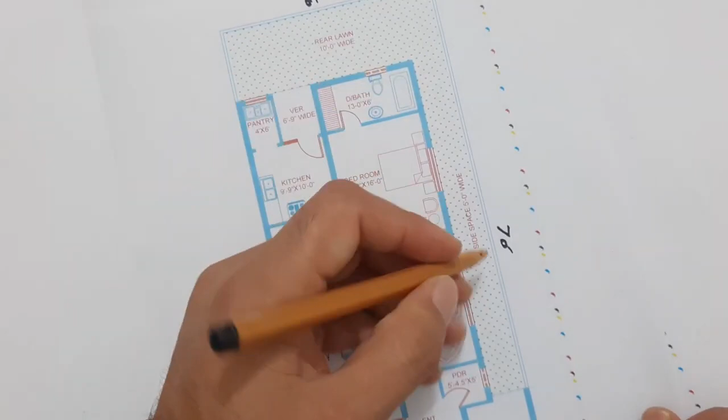Size is 30 by 70 feet. The side open space is 5 feet. The back is 10 feet.

Here we have just one bedroom on the ground floor. On the first floor we have two other bedrooms. As you can see, this is the main gate, which width is 13 feet.

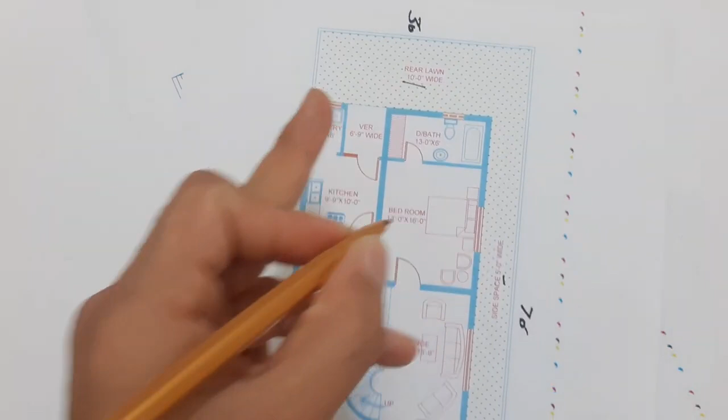This is the driveway. Front lawn is 10 feet. Back side is also 10 feet. This is the car porch. Size of this car porch is 8 feet by 8 feet 7.5 inch.

This is the main entry. So when you enter by this main entry, which size is 7 by 7 feet, this is the powder room. This is its ventilation. The first one you can see, this is a drawing room.

And here you can see the corner window for this drawing room. Size of this drawing room is 12 feet by 17 feet 6 inch.

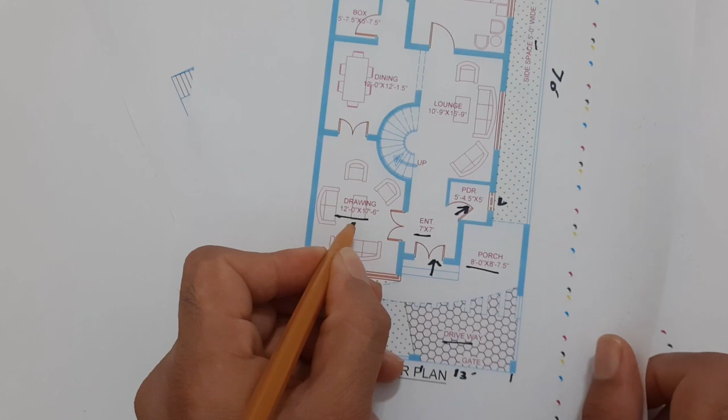Next you can see this is the first floor. This is the staircase for the first floor. Half circular stairs, you can see.

With this drawing room you can see this is the access to this dining. The size of this dining is 12 feet by 12 feet 1.5 inch.

You can see the access to this dining from this TV lounge. Size of this TV lounge is 10 feet 9 inch by 15 feet 9 inch. This is the window to this open passage.

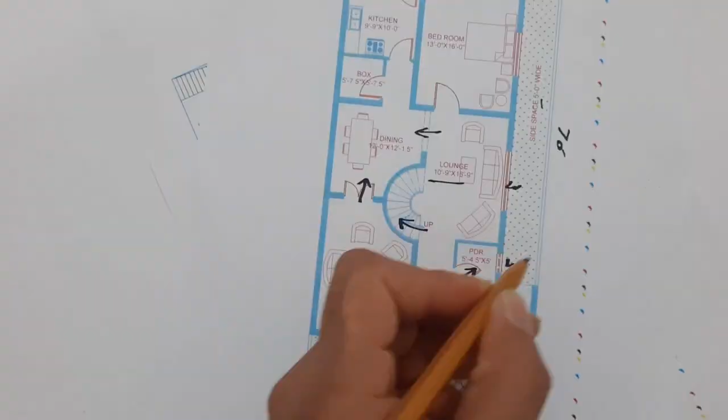Now guys, you can see this is the first bedroom. Size of this bedroom is 13 feet by 16 feet. This is the window to this open passage, which is 5 feet.

Next, with this dining, guys, you can see this is the passage, about 3.5 feet. And this is the box. Box means this is a kind of store, which is 5 feet 7.5 inch by 5 feet 7.5 inch.

And directly you can access the kitchen. Size of this kitchen is 9 feet 9 inch by 10 feet. You can see the veranda.

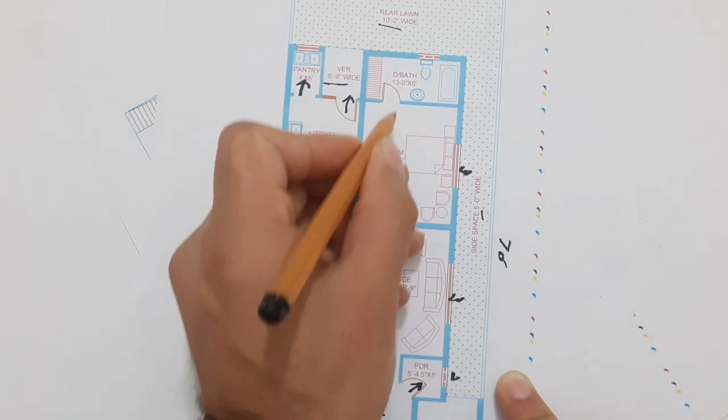Size is 6 feet 9 inch width. This is the pantry, 4 by 6 feet. In this bedroom you can see this is the dress room and also bath, 13 feet by 6 feet.

This is the wardrobe. This is the ventilation. Okay, everything is perfect. Now guys, we have also here the first floor.

So here we have circular stairs for the first floor. Access also at the back side lawn, you can use it. Guys, this is its ground floor.

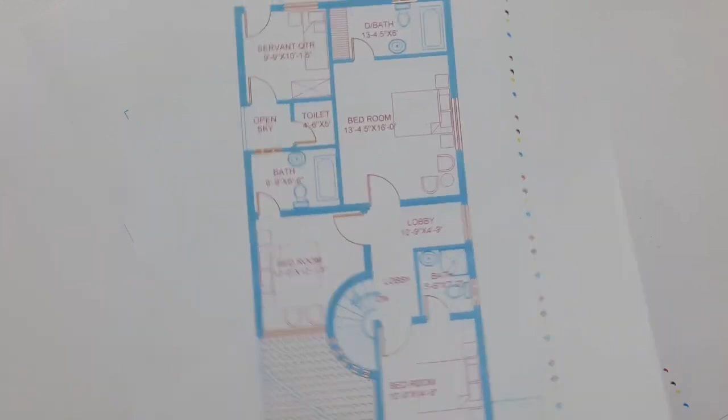This is its first floor plan. We have the first bedroom. So this is down for the first floor staircase.

So here when you go up on this stair, this is the first floor. This is the first bedroom. Size is 10 feet 9 inch by 14 feet 6 inch.

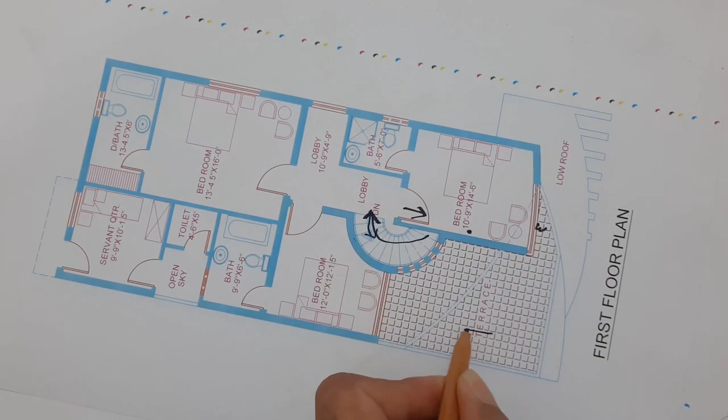This is the window. This is the low roof and this is the terrace. And here you can see the small windows.

You can see clearly for this stairs. And this is the window for this bedroom, the second bedroom. Size is 12 feet by 12 feet 1.5 inch.

Next you can see this is the lobby, which width is 5 feet. Sorry, this is 6 feet.

With this bedroom you can see this is a bath. Size of this bath is 5 feet 6 inch by 7 feet. This is the small window.

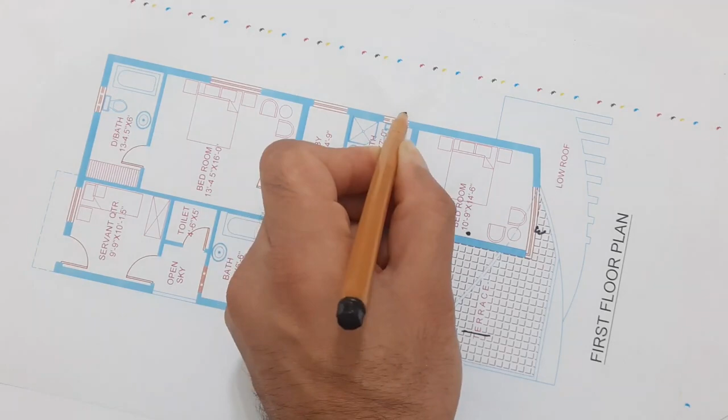This is the lobby, which width is 4 feet 9 inch by 10 feet 9 inch. This is the window to this side.

This is the other bedroom, the third bedroom. Size of this bedroom is 13 feet 4.5 inch by 16 feet. Here guys, you can see this is dress plus bath, 13 feet 4.5 inch by 6 feet.

This is its window, small. Now guys, you can see with this bedroom, this is the bath. Size is 9 feet 9 inch by 6 feet 6 inch.

And here this is the open sky. This is the window. And on upstairs you can see clearly this is a small balcony.

So here this is the servant quarter. Size of this servant room is 9 feet 9 inch by 10 feet 1.5 inch.

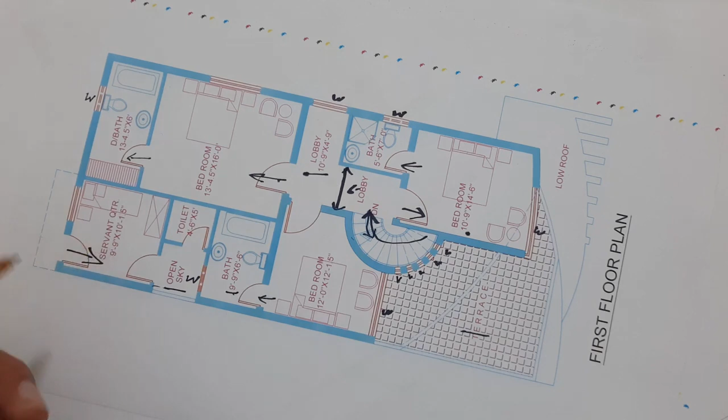And here this is the toilet with this. You can see which size is 4 feet 6 inch by 5 feet.

Guys, everything is perfect for this first floor. For first floor, this is the ground floor.